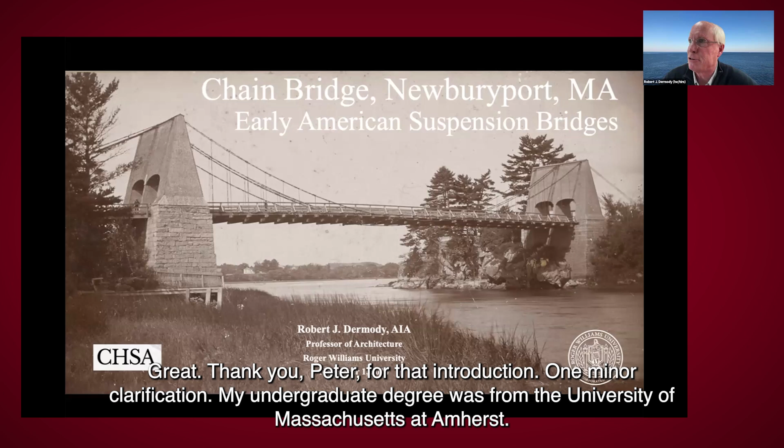Yes, we can. Great. Thank you, Peter, for that introduction. One minor clarification: my undergraduate degree was from the University of Massachusetts at Amherst, where I studied civil engineering and then got into architecture. But I have a love of bridges.

So I want to tell you the story about the Newburyport Bridge up in Newburyport, Mass., which was an early chain bridge. I was telling Peter recently how fascinating a project this was. I had heard about chain bridges, but I didn't completely understand that it was literal chain links that suspended this bridge.

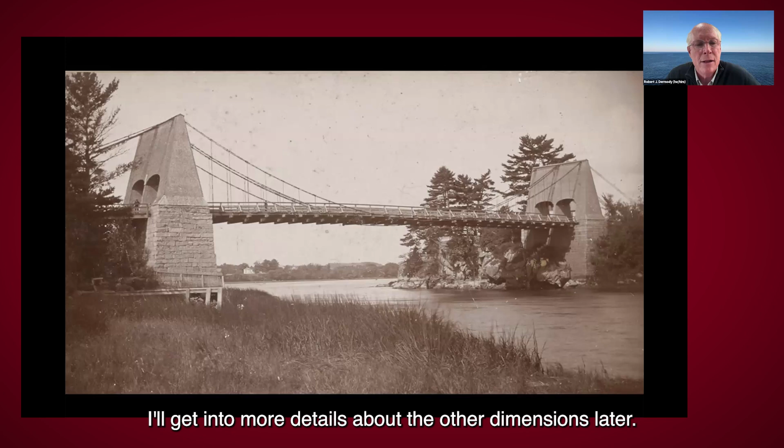So there's the image without the text, so you can see the beautiful setting of the bridge. It's about a 244-foot span. I'll get into more details about the other dimensions later, but it's significant to learn about why this bridge got built here, the use of these materials, and why this type of system was built at this time in this location.

So quick context for you: we're located just about 40 miles north of Boston.

So the bridge is located in that red circle on the Merrimack River. It spans from Newburyport, Massachusetts, into Salisbury via Deer Island, that small island in the middle of the river. There's another bridge on the other side.

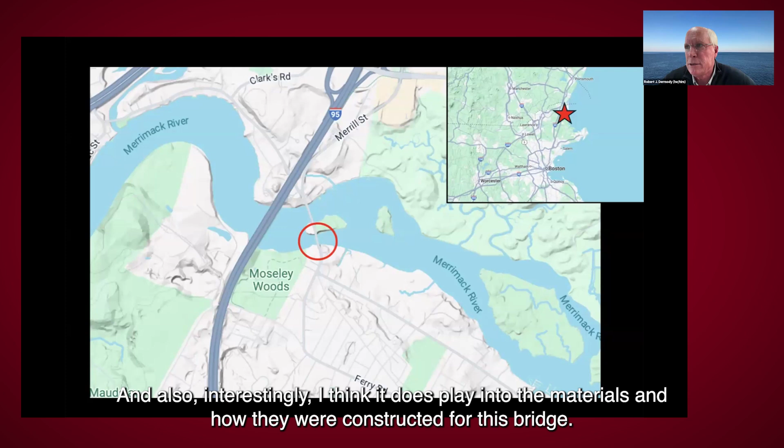I'm going to focus on the chain bridge. Route 95 has a modern steel tied arch bridge, and there are other bridges downstream, which is significant—a veritable confluence of bridges here. I think it also plays into the materials and how they were constructed for this bridge, not far from the ports of Salem and Portsmouth, which we'll factor in later.

So a little bit about the chronology of this location. There have been bridges at this site for over 230 years. The first one opened in 1792, which was timber, a common material for bridges of that era, but they didn't last very long—they couldn't survive the natural elements, the cold winters, the rain, the salt, etc.

So in 1810, a chain suspension bridge was built, closely modeled on a patent from James Finley of the Philadelphia area, who first built those types of bridges. He built about 10 of them in Pennsylvania.

In 1827, fairly early in its life, there was a partial collapse—this happened in February. There was noted to be heavy snow and ice on the bridge, and simultaneously some farm animals, oxen and horses, were being driven across it, and the confluence of that all caused the bridge to collapse. However, it was rebuilt in kind; they just replaced the chain, which suggests they believed in the system, but it was just primarily due to the heavy snow and ice.

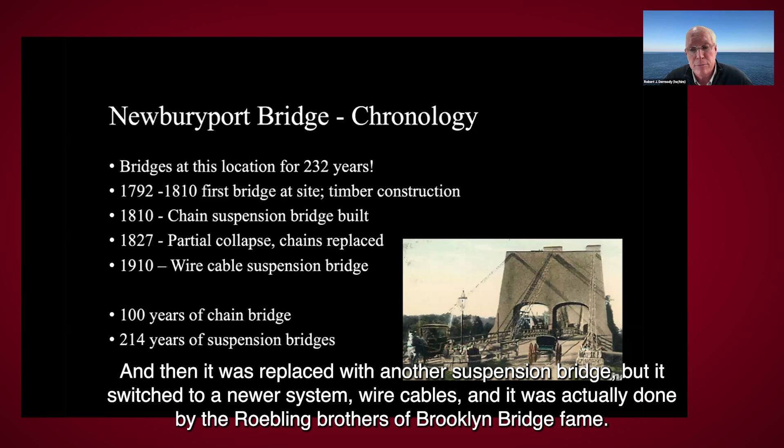The bridge did last until 1910, but it evolved, and I'll try to show you some images of that. It was then replaced with another suspension bridge, but switched to a newer system, wire cables, done by the Roebling brothers of Brooklyn Bridge fame, which had just opened not that much earlier. So the chain bridge lasted 100 years, a record at the time, and for over 200 years there has been a suspension bridge in this location.

This text here is captured from James Finley's patent application or description, and I've underlined some key terms. He's interested in safety, simplicity, economy, and duration for these structures. These certainly remind me, from my architectural education, of the principles from Vitruvius—firmitas, utilitas, and venustas. I also note that simplicity is perhaps something we could use in our modern structures.

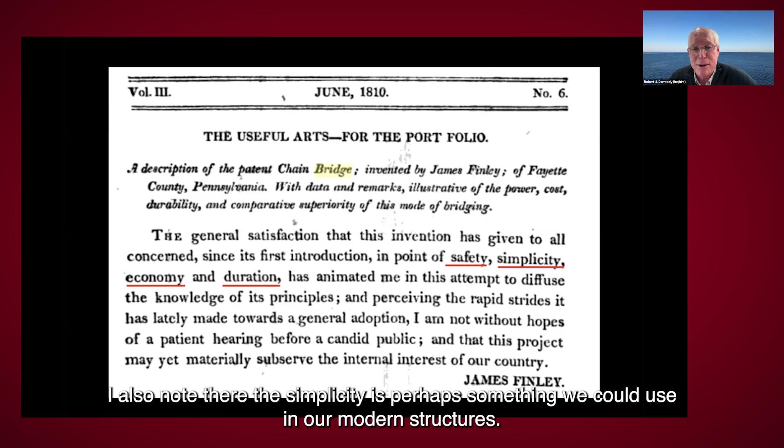This is an image not of the Newburyport Bridge, but of a chain bridge of this time from Finley's patent application. I just want to point out some key features of any suspension bridge, which interestingly have really not changed over time—the basic components and forms. But what has changed are the materials, connections, and ways to stiffen them.

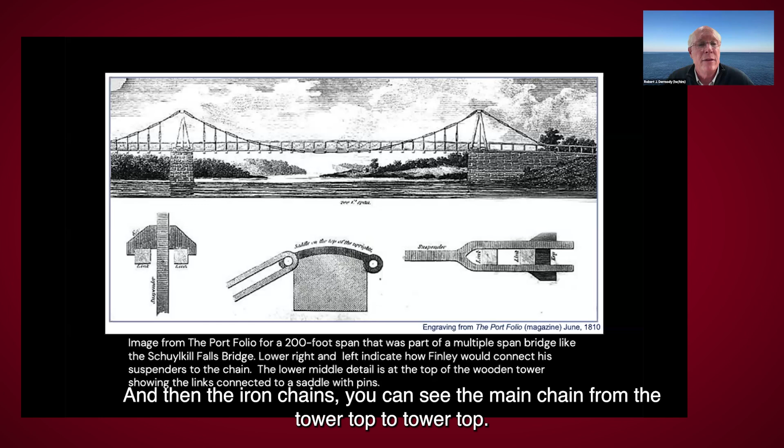Primarily, the components include the abutments, which were stone at this era and remained so for a long time. Timber was used for the towers on top of the abutments and for the deck. Then the iron chains—you can see the main chain running from tower top to tower top. There were also vertical chains from the main chain to support the deck, called suspenders.

Just below here, I highlight in red the cross section of the chain. The chain links were about 2 feet long, square in cross section, maybe about 1.5 inches on a side, so not very big. These were strung together, and we'll see in later drawings how they were specifically designed for the stresses they expected. In the center is a saddle showing how the chain would work over the top. It's interesting—they used a separate piece for the curved portion because they didn't want to bend the actual chain link itself.

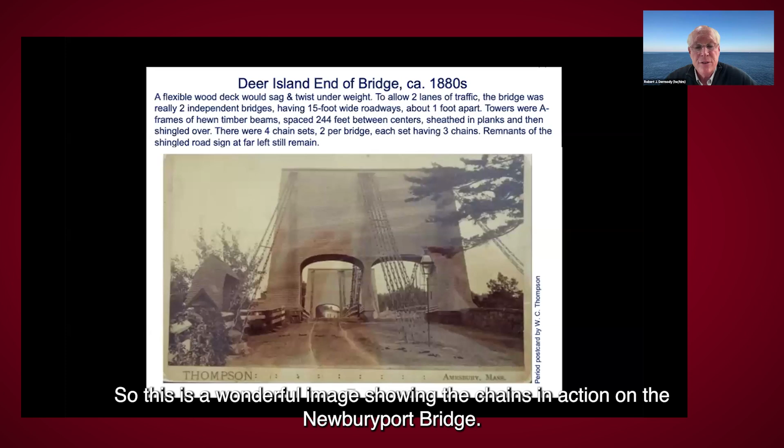This is a wonderful image showing the chains in action on the Newburyport Bridge. You'll see there are 3 on the far left, 3 on the far right, and 6 in the center—so 3 each for the spans on either side. There were individual passageways on each side, separate portals. The tower here is also a good shot of the beautiful shingle covering the timber framing, a classic New England shingle style.

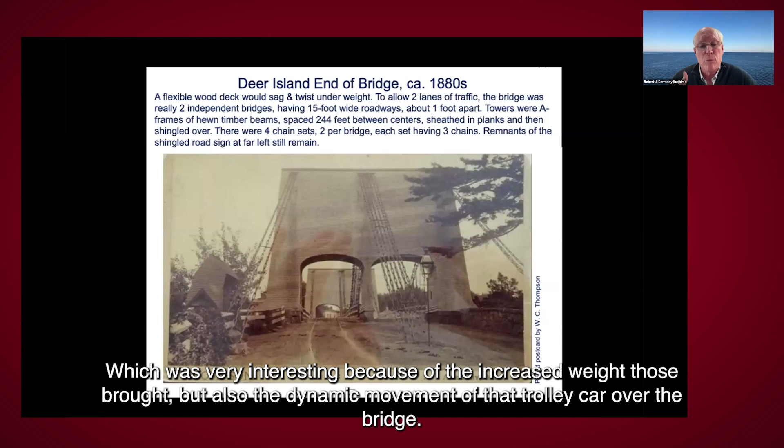You can also notice train tracks—electric trolleys were added to the bridge much later, which was very interesting because of the increased weight those brought, but also the dynamic movement of the trolley car over the bridge. That was one of the challenges for early bridge builders: stability. Strength was not as much of an issue, but stability and stiffness due to dynamic loads—from farm animals as I mentioned earlier, from trolley cars, and also from wind from the side.

This image also shows something very important about the chains. The chain out over the center of the span is a catenary curve, and that comes from the fact that the vertical suspenders are evenly spaced, which helps work with the deck. But the backspan chains, as you can see on the right side of the photo, have no vertical suspenders, so they're straight.

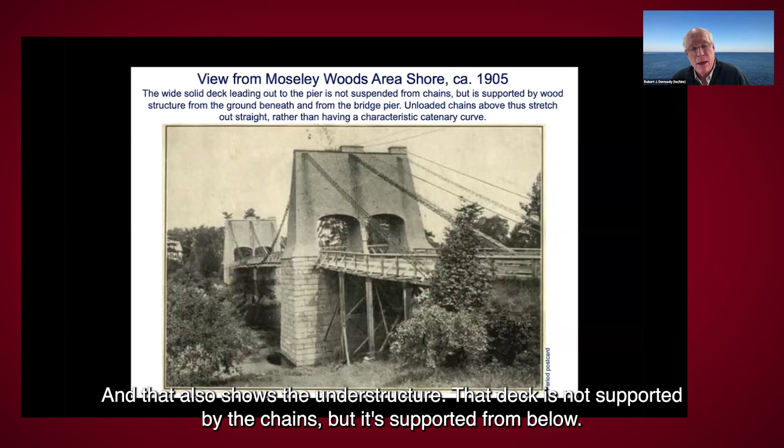That also shows the understructure. That deck is not supported by the chains, but supported from below by timber framing. You'll notice one dark timber frame there in the center at an angle, leaning down onto the abutment, and I'll talk about that in a moment.

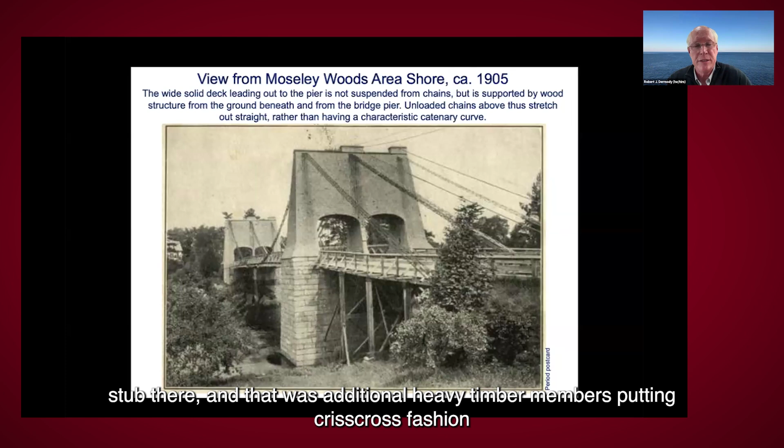A couple of other things to notice in the middle and top right side: you see a little stub there, and that was additional heavy timber members put in crisscross fashion to allow additional wire cables. Wire cables were added before the end of the life of this bridge, because that was the side where the trolleys were, which had a heavier load, so they added extra wire cables. Then at the very top, the very thin lines were the electrical cables.

Also notice the form of the two portals with the center wall.

I found this drawing in the research. It was a beautiful drawing of the record of the structure of this building. On the far left are the longitudinal sections, and on the far right are the cross sections in elevation. On the left you see the timber framing used inside, which was covered — the covered bridge aesthetic from New England, and that knowledge was brought to bear here.

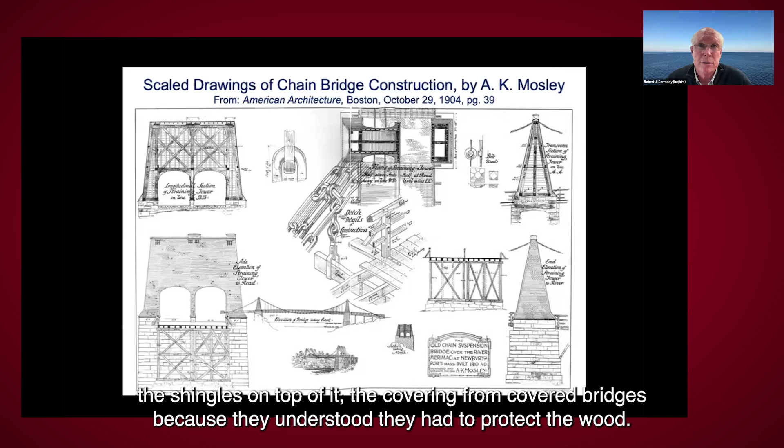On the lower left, we see the timber framing inside the abutment, and these are direct relations to other constructions in the area: timber framing from barns and large churches, the shingles on top, the covering from covered bridges because they understood they had to protect the wood. Lower left, these are very similar to piers built along the New England coast using heavy timbers with rocks inside them, called cribs.

On the right, a couple of things to note from Mr. Finley's patent application. The chain at the top wants to have the same angle on either side of that tower. In fact, in this drawing, the chain on the right should be straighter because that's the one without the suspenders. The significance of the equal angles relates to the structural principle of ensuring that the resultant vector, the compressive force from the tension in the cables, would go straight down into the tower.

That provides stability and stiffness to the tower as well. You'll see the tower is the two outside timbers, but also a center one, which would take that force right down into the abutment. In the lower right, you can just see a little diagonal — that's the strut we saw in the earlier photo, helping hold up the backspan using the abutment so they didn't have to go all the way to the ground at that location. It's an angle providing some stability as well.

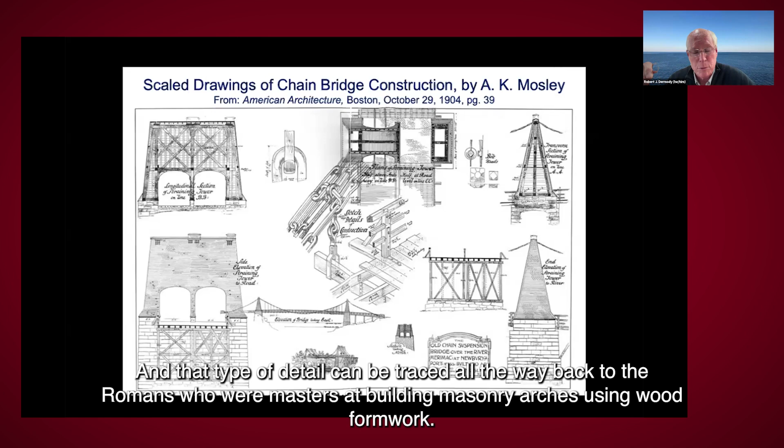That type of detail can be traced all the way back to the Romans, who were masters at building masonry arches using wood formwork. There's a very similar detail you can trace back to the Pont du Gard in southern France, in Nîmes, where the Romans would build little ledges in their masonry to put a strut to support the formwork. It's an interesting tradition of construction coming down through the ages.

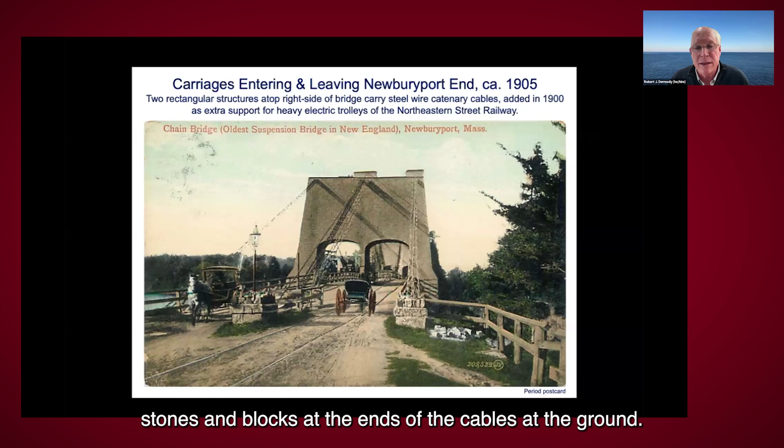This photo shows some things we've seen before, but I want to call your attention to the anchorages, the large stones and blocks at the ends of the cables at the ground. We see two of them here on the trolley side; we can't see the one on the far left because it's a little lower. That was a significant part of the design as well.

James Finley noted in his patent that it would be advisable to splay out the chains when they got to the anchorages, meaning add more branches. So instead of a single chain, it would branch out into multiple chains, and that allowed more surface area to be piled over with rock.

A large pit would be dug, stone would be set in the bottom, the chains would be laid on top, and then heavier stones and blocks would be laid on top of that. They may have even used some iron bolts to secure it.

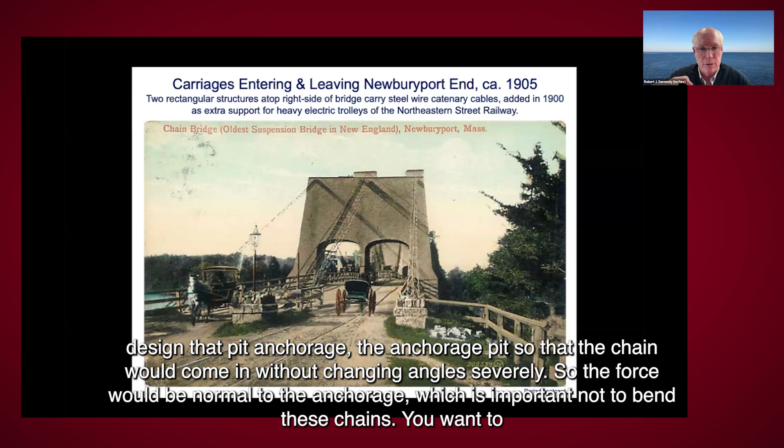It's also important to design that anchorage pit so that the chain would come in without changing angles severely, so the force would be normal to the anchorage. This is important, not to bend these chains — you want to let them work in their pure tensile capacity.

They studied them and wanted to find their strength, and wanted to find out where they might break and how they might break, and study the welds.

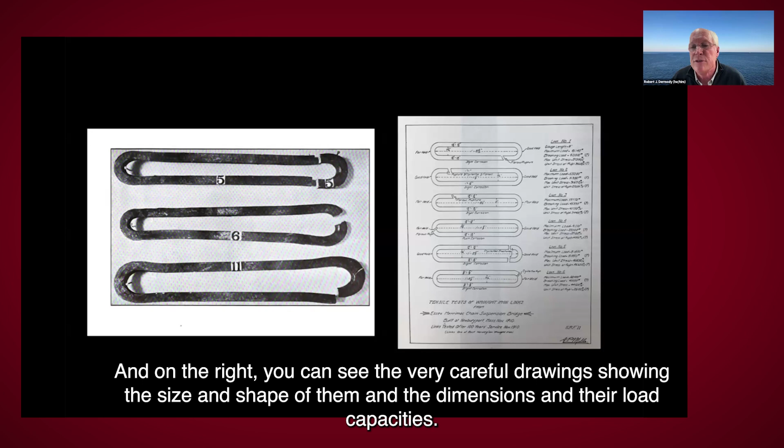The drawings also show the dimensions and their load capacities. Especially in that bottom one, you can really see the ends would be thickened right where the next link would come in.

This is early 1800s, and this is not Newburyport now. These are much bigger span bridges, but also called chain link bridges, though in a very different style. The bridge on the left is the Thomas Telford Menai Bridge in Wales from 1825.

On the right is the Clifton Suspension Bridge by Isambard Kingdom Brunel, 1831. But these are different, much bigger spans.

But they're flat bars, and the difference with this system is you can aggregate them. You can just stack them side by side and increase the capacity and layer them.

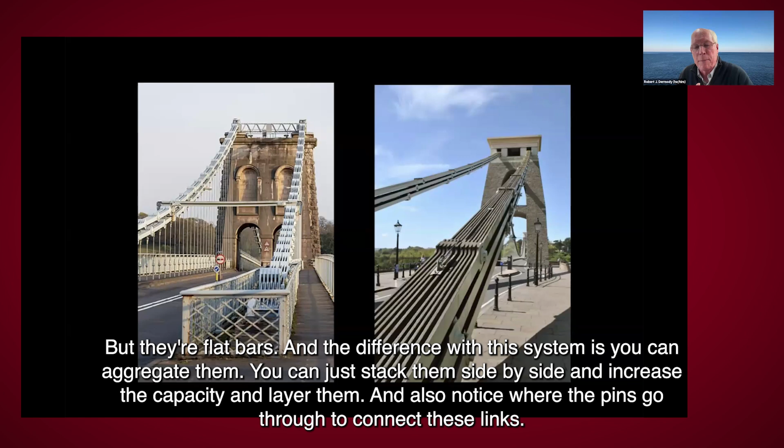Also notice where the pins go through to connect these links, the bar itself is widened into a dog bone shape. That shows they understood there would be increased stress right where the pin is acting and bearing on the inside of the pin connection.

My sense is that they had a bridge that was working, and this one overlaps with the chain bridge, although I don't think it lasted as long. I'm not sure why, but my theory is that it was a much bigger, longer bridge, much more exposed to the weather, and had many more moving parts.

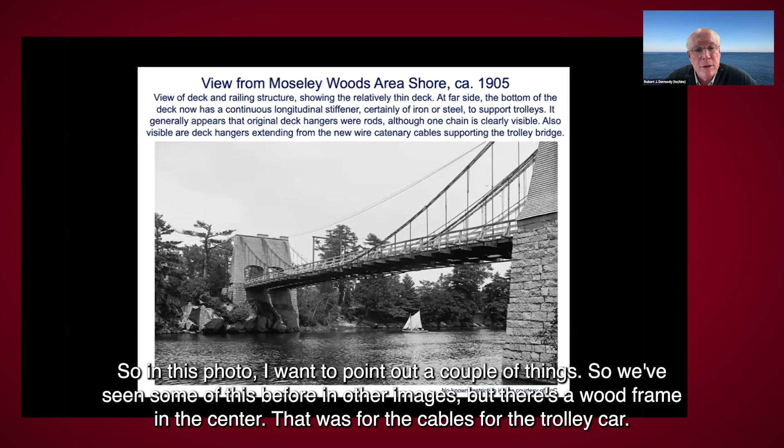In this photo, I want to point out a couple of things. We've seen some of this before in other images, but there's a wood frame in the center — that was for the cables for the trolley car. There's also a stiffening girder under the trolley car side.

In the very center, right over the little sailboat, you can see a curve coming down below the deck. That's an interesting relationship the designers have to decide upon — the relationship of where the deck is to where the chains are.

Also interesting to note here, as we have additional cables, the main chains are still there, but the verticals — now some of them appear not to be chains. There is one on the far right that you can see, very close to some others, that is still a chain.

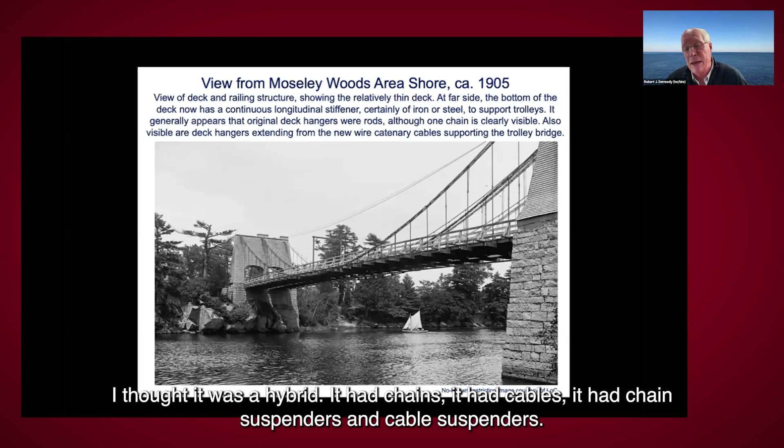So this bridge was a hybrid — it had chains, it had cables, it had chain suspenders and cable suspenders and stiffening girders. It was sort of evolving because it lasted so long.

There's a beautiful postcard of the bridge, and there's lots of them. So the bridge was well loved in the community. It was painted and photographed by people. You can see the trolley car going over, and you can see the steamship. So it's a very active area.

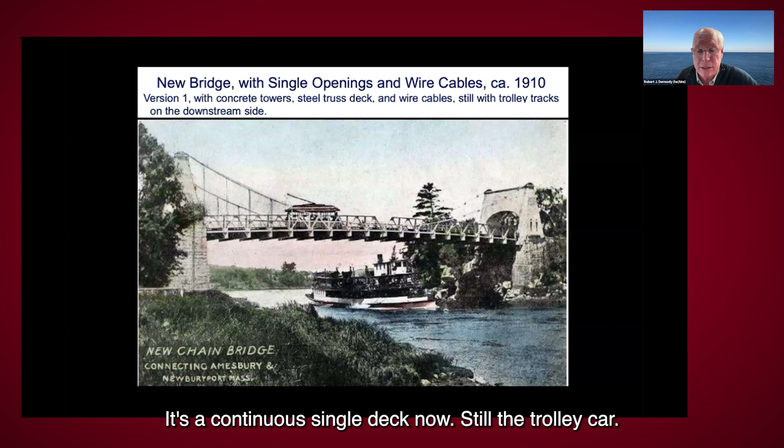But I show this photo because I want you to compare it very closely to the next one. You'll notice now the tower is very different. There's a single portal now. This is 1910, so this is the new bridge. It's a cable bridge, with cables only on the outside of the deck. It's a continuous single deck now, still the trolley car, but also notably a very deep 5.5 feet or so stiffening truss on each side of the bridge to help stiffen the deck. The vertical suspenders appeared to be spaced a little differently than before, and also much deeper cross members.

So here's a photograph of it very recently in today's form. The tower is still in the same sort of mode, but not as characteristic. It's not shingled, it is concrete. It shows the single portal, but we do have riveted steel trusses on each side. You can see the paired cables.

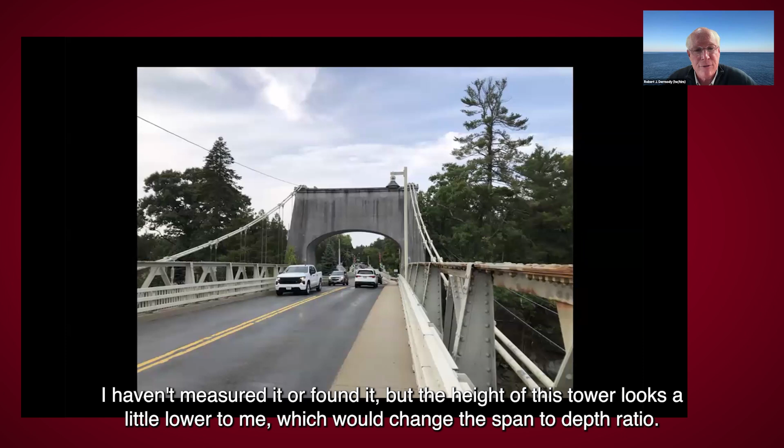I haven't measured it or found it, but the height of this tower looks a little lower to me, which would change the span to depth ratio of the bridge. But the wire cables could handle that increased load with the lower cable, because a flatter cable would tend to have more stress than a deeper cable. But that's the trade-off in suspension bridge design: deeper cables or a bigger sag has less stress, but therefore you have to build bigger towers.

It's a very well-loved bridge. There's lots of signage there proclaiming its endurance and who built it. There's obviously some weight limits on it today. But I'd just like to close with the importance, I think, of the legacy of this and why this type of bridge wound up in Newburyport, Mass.

You had a very talented craftsman workforce of people who built barns and churches out of wood. There were Irish immigrants who built masonry structures for churches, dams, and bulkheads for harbors, and blacksmiths, related to both the agricultural and the maritime industries. So those all came together, and I think what can be most interesting is the combination of all of those. Each worked in their separate industries, but it's the combination of them into this beautiful bridge that allowed it to last so long.

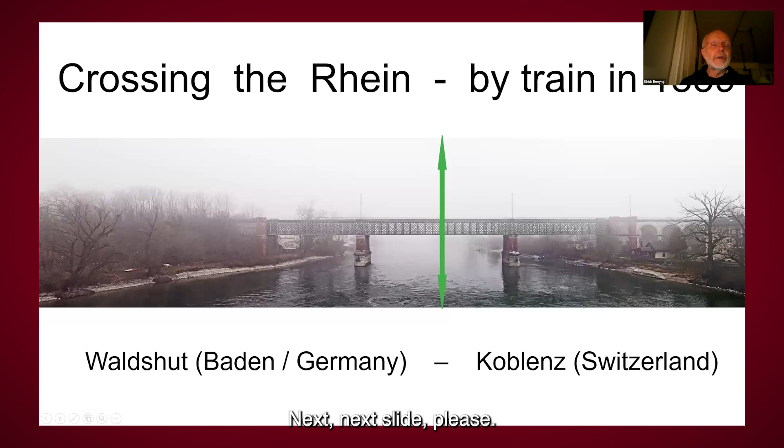For a few minutes, I would like to take you to the middle of the 19th century, to Europe, southern Germany, to the Grand Duchy of Baden, and to the border of Switzerland. At that time, Baden was a sovereign state in the so-called German Confederation.

In 1840, the Baden State Railway opened its first railway line between Mannheim and Heidelberg. The railway then followed the River Rhine and reached Basel at 1855. On its long-distance goal to Lake Constance, the track construction stopped in 1856 in Waldshut.

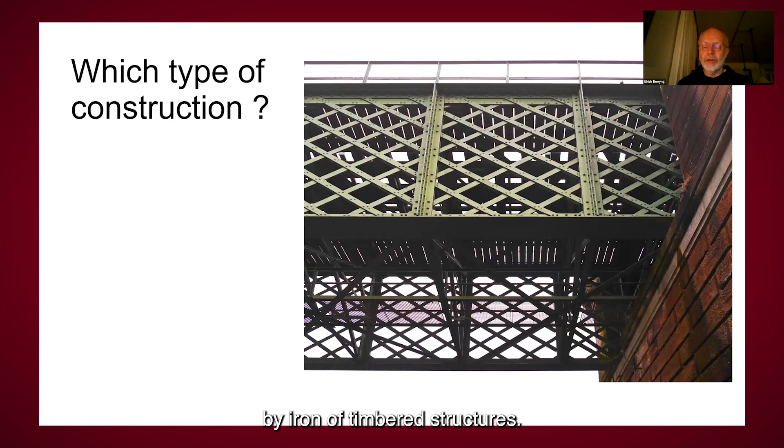I don't have to read all the terms, you can see it yourself. The total length is about 190 meters, or about 208 yards, including 6 massive arch openings in Koblenz. On the left side is the Swiss side, on the right side the Baden side. The actual iron construction measures about 130 meters. On top, the bridge could have carried 2 tracks, but it never did more than 1. The puddle iron weighs about 530 tons, and the iron construction was assembled within 8 months, from December 1858 till July 1859.

Benckiser used the later railway embankment in Waldshut to build a wooden workshop building, 22 by 27 meters. It was large enough to build the parts of a third of the total length under its roof. You see the roof and the workshop on the right side.

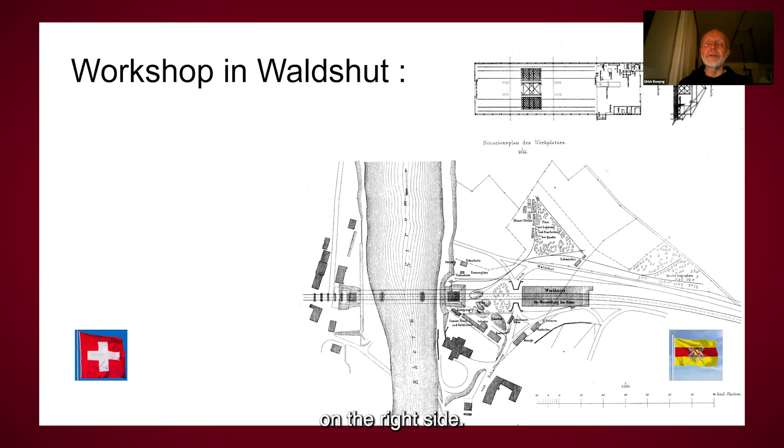The whole construction was manufactured in 3 parts, successively built and moved outside the workshop, connected with approximately 33,000 rivets to lattice girders. The parts were connected between the middle of May and the end of June 1859, to a total length of 130 meters.

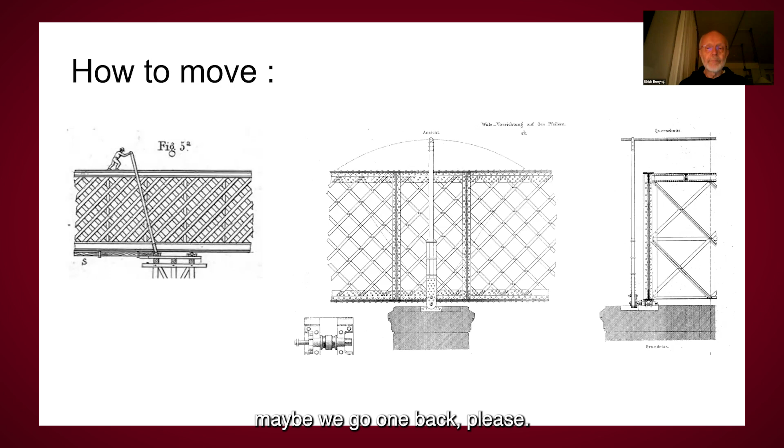During each of the 3 advances, the connected parts were pushed forward outside by about 44 meters. Since there was no scaffolding over the river, a wooden stem beak was mounted in front of the girder, seen here in the middle.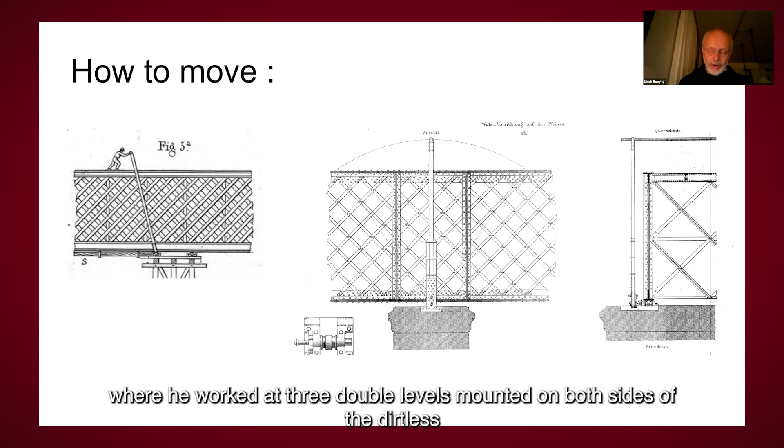Benckiser also required a wooden auxiliary support about 37 meters away from the pillar to reduce the free floating overhang in the wide center opening. To move the construction, the company needed the strength of about 60 men divided into 3 groups standing on top of the bridge. A painting from Bern shows where the workers stood upon the girders. They worked at 3 double levers mounted on both sides of the girders, and every move of the levers shifted the structure approximately 10 centimeters, so they had to move for a very long time.

Between June 29th and July 9th, it finally took 10 days to move the iron bridge over the Rhine. The iron structure then had to be completely lifted in order to install the final support rollers. And now to the historic photos.

The contemporary photos from 1859 show the bridge under construction, seen from the Swiss riverbank. In this first photo, you can see on the left side the massive structure, and on the right side, in the middle, you can see the iron construction coming from the right side, though not very clearly.

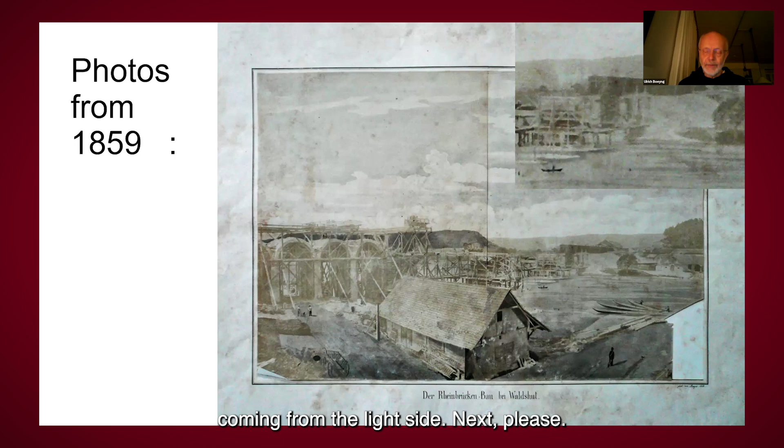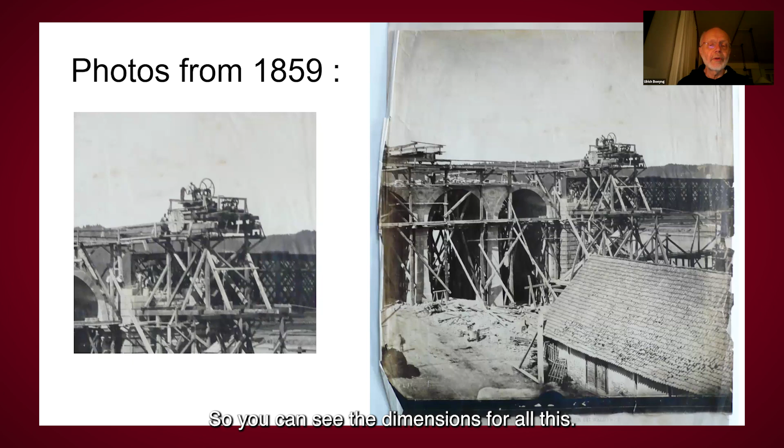Here is a view of the construction. Interesting is that you can see the wheel on the left side, and there is a small person, so you can see the dimensions of all this.

Benckiser strived to perfect their skills in every project. For example, in Strasbourg in 1861, an attempt was made for the first time to move the 177 meter long iron structure across the Rhine using steam engine power. Since this was unsuccessful, the about 1,000 tons had to be moved again using only muscle power.

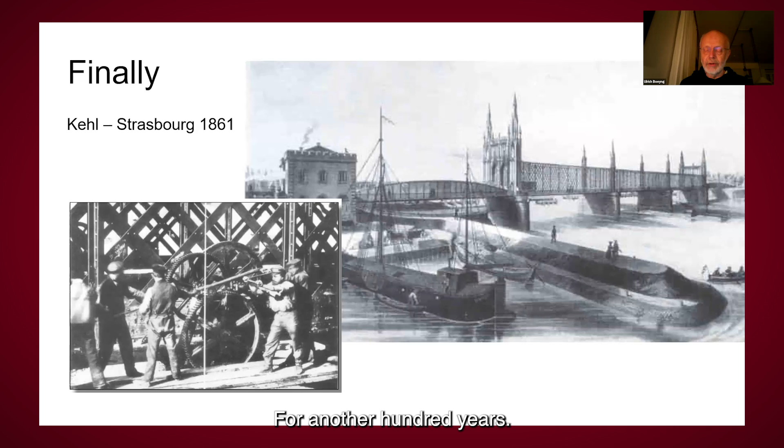And my last words: in 2009, Switzerland listed the bridge as a cultural asset of national importance, and in 2012, the German Monument Preservation Authority followed suit by assessing it as a cultural monument of particular importance. So we can hope that the bridge manages to stand for another 100 years or even more.

Last, please. Thanks for listening.

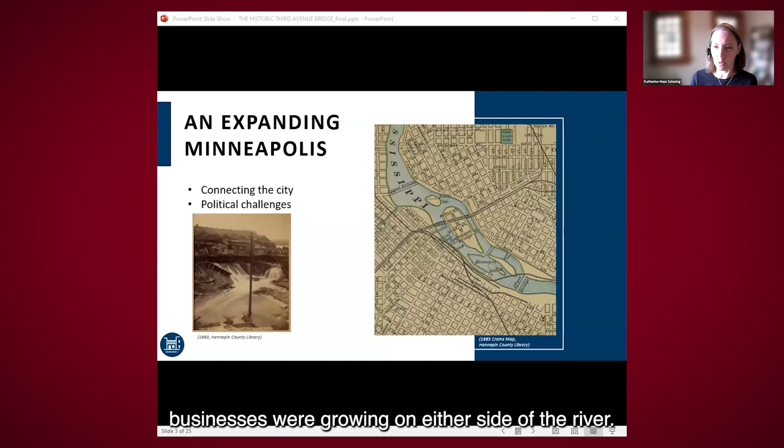Okay, so at the turn of the 20th century, Minneapolis was expanding rapidly. We had flour and lumber mills harnessing the power of the Falls of St. Anthony. Businesses were growing on either side of the river. To the west, Minneapolis's downtown was growing, and to the east, the village of St. Anthony was also picking up steam and becoming a burgeoning residential and business district.

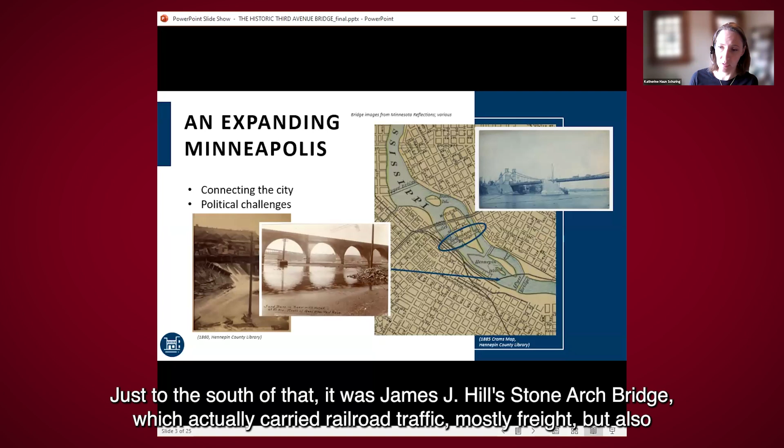Politicians began discussing the need for another crossing of the Mississippi here as early as 1890. But at the time, there were only 4 crossings of the Mississippi. The first was the Hennepin Avenue Suspension Bridge. Just to the south of that was James J. Hill's Stone Arch Bridge, which carried railroad traffic, mostly freight, but also people over the Mississippi. Further south was the 10th Avenue Bridge, the Levee Bridge, and to the north, the Upper Bridge, also known as the Plymouth Avenue Bridge. So very, very few locations.

Of these, the Hennepin Avenue Bridge saw the most traffic. And just like engineers today, they counted the traffic at the time, and here you can see how they were making a case for the need for a bridge. Hennepin Avenue was overwhelmed with traffic, wagon traffic, automobiles, carriages, pedestrians, compared to the 10th Avenue Bridge to the south and the Plymouth Avenue Bridge to the north. It's no wonder that the suspension bridge was seeing so much traffic because it was the only bridge actually located within downtown Minneapolis. Not shown in this graphic is the streetcar line that the Hennepin Avenue Bridge also carried, running to the village of St. Anthony, carrying several thousand people.

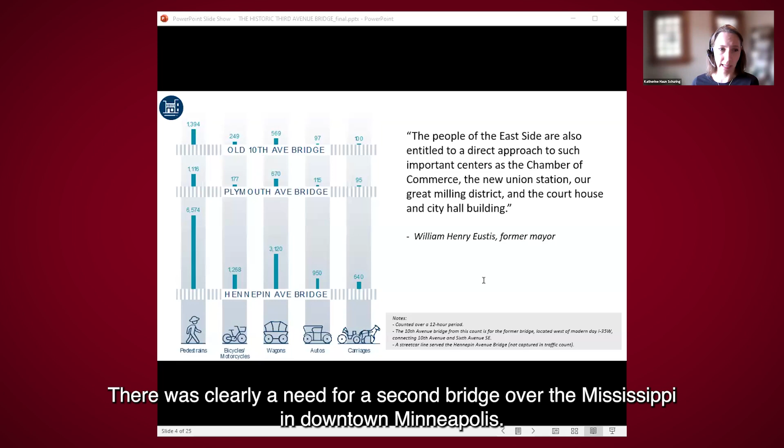Today, that streetcar line continued to the east all the way into St. Paul. There was clearly a need for a second bridge over the Mississippi in downtown Minneapolis. But it took decades of debate, strife, and public requests before the Minneapolis City Council actually agreed to place a new crossing between Hennepin Avenue and the Stone Arch Bridge. The city bridge engineer at the time,

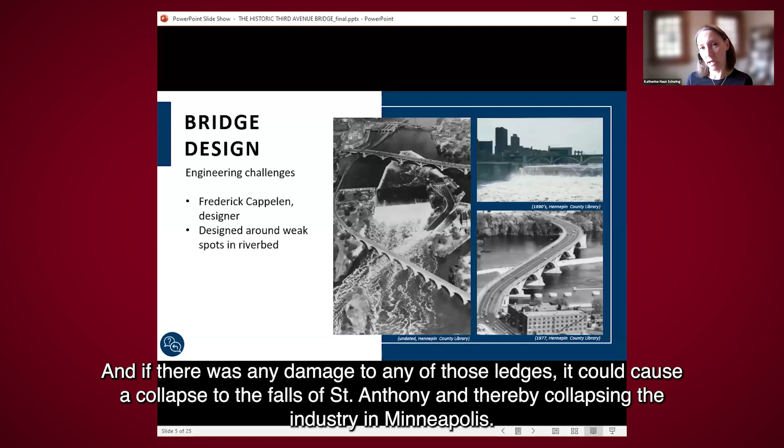Frederick Cappelen, was the designer and was tasked with making the council's directive a reality. Cappelen was a Norwegian-born engineer who was educated in Sweden and Germany and emigrated to the United States in the 1880s. He understood that the location of the new bridge was a precarious one because in this particular area of the river, there are very fragile limestone ledges. And if there was any damage to any of those ledges, it could cause a collapse to the Falls of St. Anthony, and thereby collapsing the industry in Minneapolis.

Okay, so what did he do? The city actually hired the concrete and steel engineering company out of New York to design a bridge. National public sentiment at the time really liked concrete arches, reminiscent of the arches in Paris, as seen in a couple of different newspaper articles.

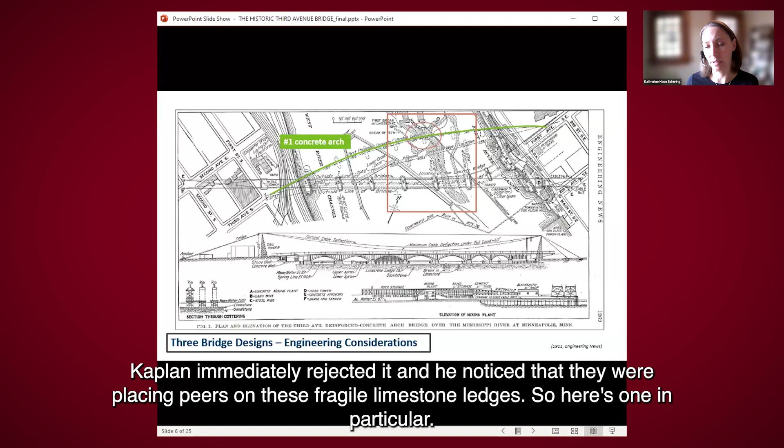Really, people wanted an arched bridge over this location. So the engineering company came back with this design. Cappelen immediately rejected it, noticing they were placing piers on fragile limestone ledges. Here's one in particular, right on top of that ledge, probably would cause a collapse of the falls.

So Cappelen took it upon himself to design his own bridge. He designed a parabolic arch that would span 435 feet across the river, with only a couple of pier locations in the river—a beautiful thing. But the public said no, I don't want that, I don't like that, I want something more pretty. So Cappelen went back to the drawing board.

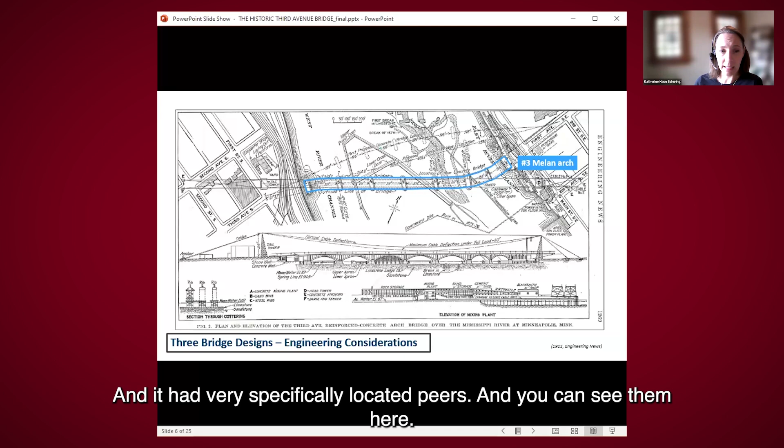He collaborated with the concrete and steel engineering company to come up with this final third design. It's a Melan arch—concrete steel superstructure embedded with concrete—with very specifically located piers, right along the river, avoiding those fragile limestone beds. The only way to do that was to create this curve, so you're creating a curve in the bridge to make sure the Falls of St. Anthony would be maintained.

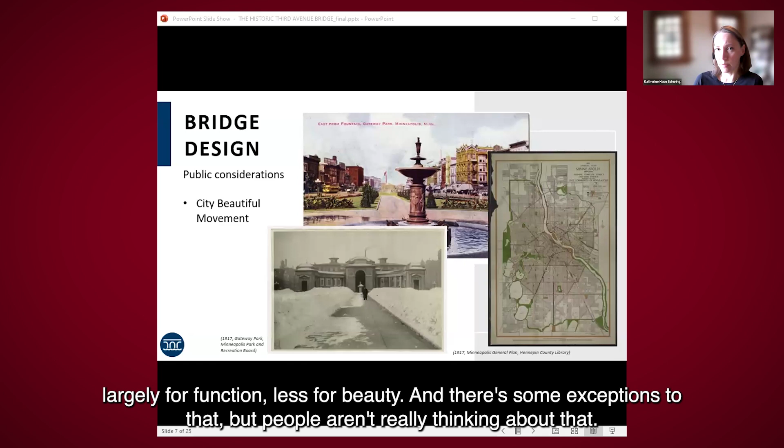So why are people so interested in the design of a bridge? Predominantly prior to the early 20th century, bridges were designed largely for function, less for beauty. There are some exceptions, but people weren't really thinking about that. Aesthetic consideration in bridge design was becoming a really important thing in the early 20th century, largely due to the City Beautiful movement.

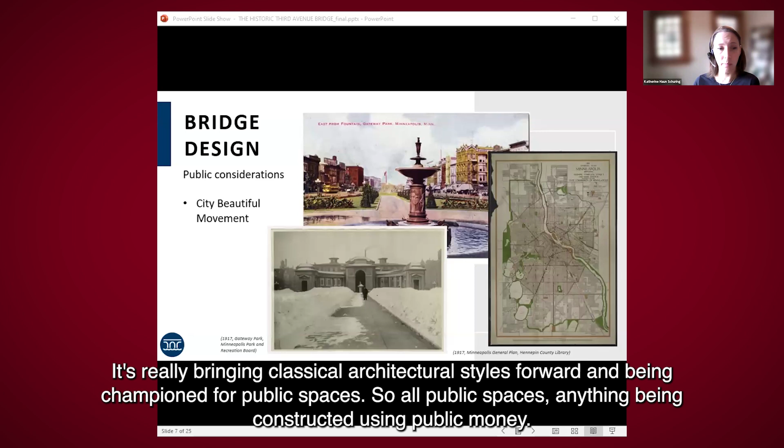That's emerging from the 1893 Chicago World's Fair. It's bringing classical architectural styles forward and championing them for public spaces. So all public spaces, anything constructed using public money, would be designed to be beautiful, classical, harkening back to a period of Greek and Roman architecture, where people were really feeling democracy. There were a number of places within Minneapolis where you saw that come forward in public buildings—Gateway Park is an example.

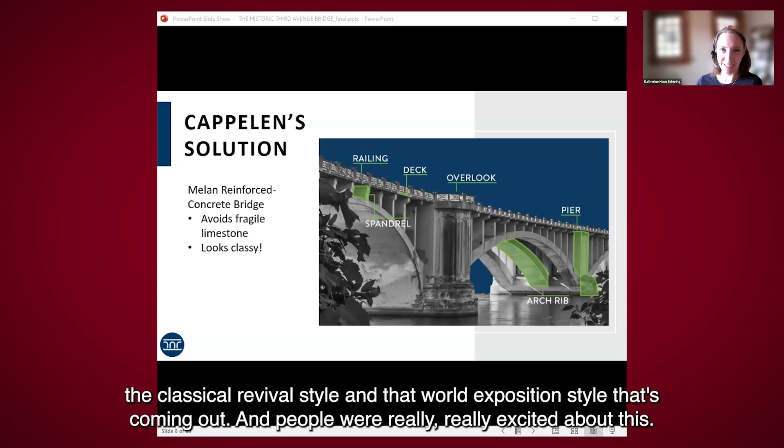So what's the solution here? We've got a Melan reinforced concrete bridge. Cappelen's solution is to avoid that fragile limestone, but it looks really nice and the public is very happy with this. It embodies the classical revival style and that world exposition style that's coming out, and people were really excited about this.

This is Chris and I's favorite quote from a newspaper article: 'Stone arch construction would have been impossible or exceedingly expensive. Steel bridge construction would have been awkward, kinky, and crude.' There you go, Cappelen—your bridge design was awkward, kinky, and crude. But with reinforced concrete, no trouble was encountered in making the gentle curves and creating a pleasing appearance.

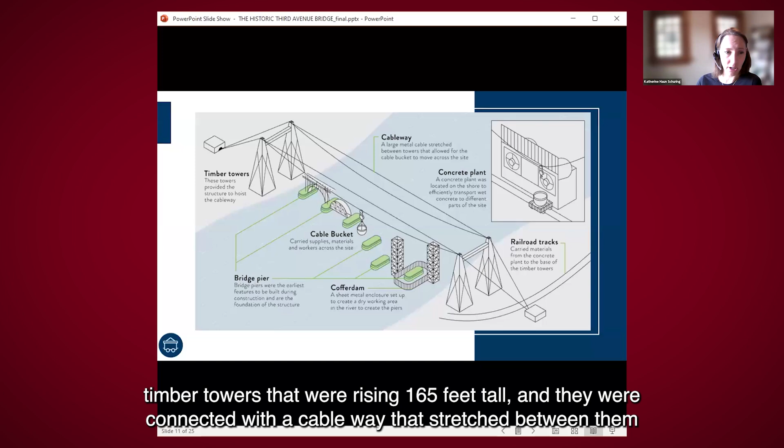So here we are, August 1914, we start building the bridge over the Mississippi. How did they do it? To move materials and supplies over the river, construction workers erected timber towers rising 165 feet tall, connected with a cableway stretched between them. On that cableway they ran buckets and supplies out into the middle of the river to those construction workers.

Cofferdams were erected within the middle of the river, or wherever they needed a pier, and built down into the riverbed, secured in the riverbed, and from there they would support those arches.

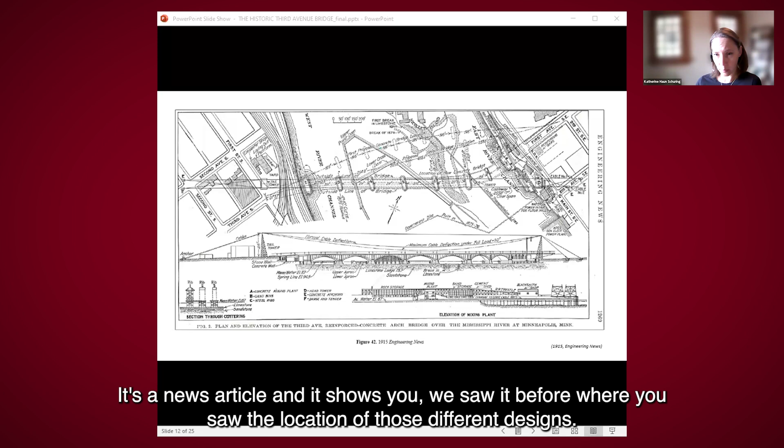This is a really wonderful image from the 1915 Engineering News. It's a news article that shows the location of those different designs, but here in the bottom part of the image, you really see how those timber tower structures stretch that cable all the way across the Mississippi, and how they built and brought in those supplies.

They had an actual rail line that came in, with a mixing plant. They brought their rock in, did all of their mixing in batches right there on the side, on the east side of the river, put it in those buckets, and sent it over the river into the locations where things were being constructed.

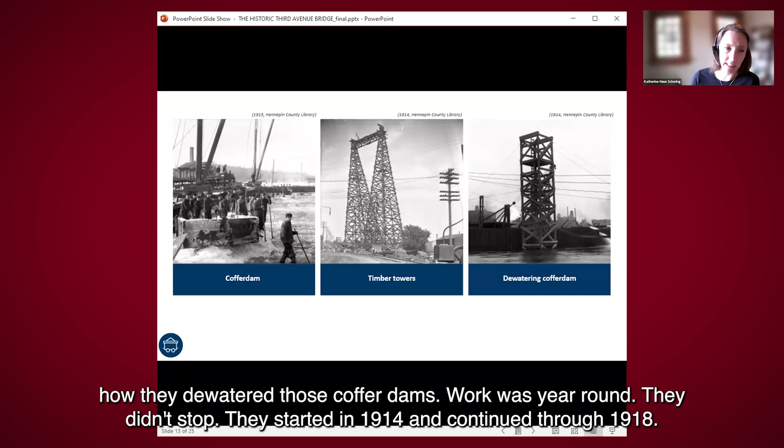Here's some great images from our historical society showing construction of the cofferdam, construction of timber towers, and how they dewatered those cofferdams. Work was year-round—they didn't stop. They started in 1914 and continued through 1918 in the sleet, snow, and very bitter cold of Minnesota. They made their concrete mix work by heating the sand and water, making sure their Portland cement and all of their superstructure was warm to maintain the consistencies they needed.

Couple of other images here. Bridge falsework was erected over the concrete piers to build those steel arches that then would be encased in concrete. Initially, it took crews 1 day to move falsework between the different sections, but by the end of the project, they were able to move that falsework in 2 hours and 40 minutes. So they found a lot of efficiency.

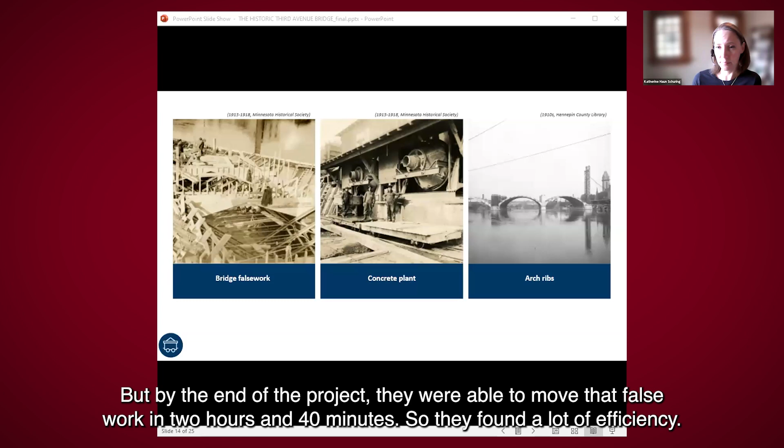Here's a wonderful image where you can see one of those concrete ribs has been constructed and they're moving on to the second one. Each span has 3 concrete ribs, so you can imagine moving that falsework 3 times and then moving on from there. From those falsework, those open spandrel columns would rise up from the arches and would then support the bridge deck.

Opening day was June 14th, Flag Day, in 1918. City Council asked all of the community to come out and celebrate, and all of the schools had their students come out as well. It took 4 years to construct that bridge.

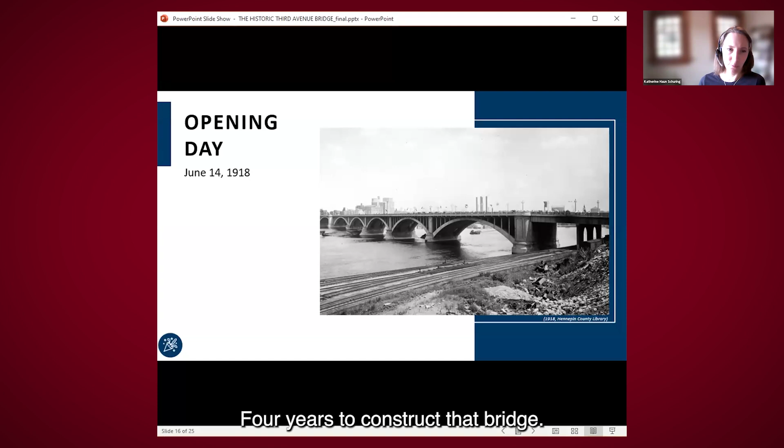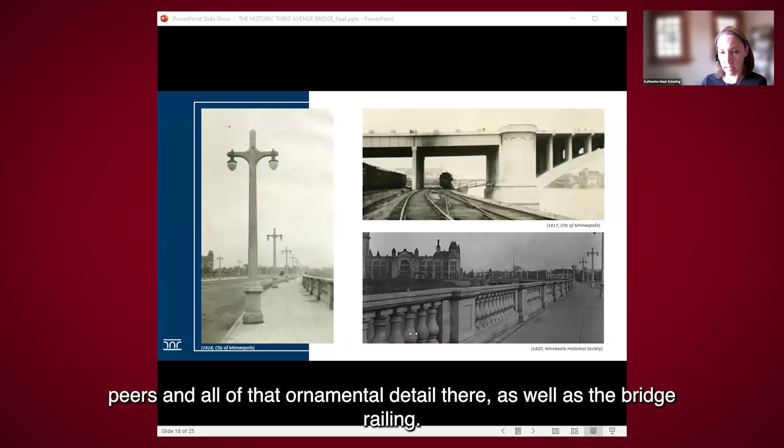That classical revival detailing is on full display. It's very apparent in the piers and all of that ornamental detail, as well as the bridge railing. The light posts, the light standards, were quite unique, a specialty design for this particular bridge. At the very top, this is where the streetcar line electrical wire would have been connected. It would run down the electrical line through the middle, and then be supported on the tops of these rails.

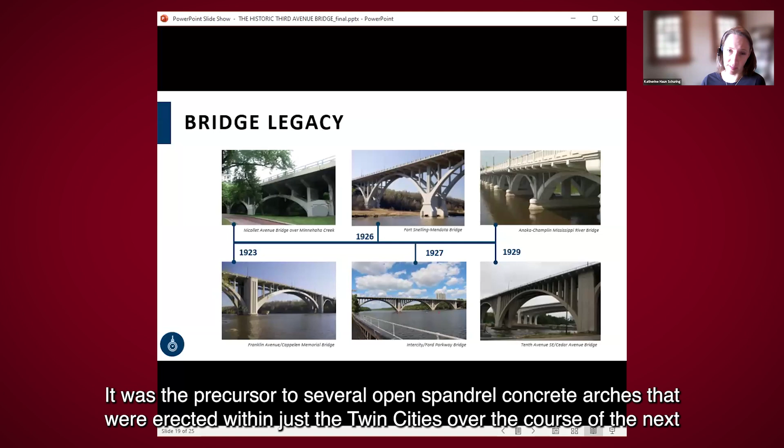The bridge legacy: this is an incredibly important bridge to Minneapolis history as well as Minnesota engineering history. It was the precursor to several open spandrel concrete arches that were erected within the Twin Cities over the course of the next 10 years. All of these are great examples of the design style, but Third Avenue is the one that set it all off.

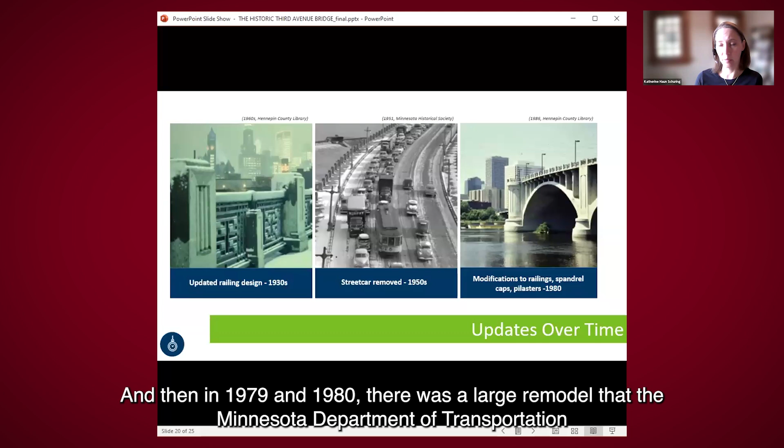There were several updates over time. The railing was changed out in the 1930s to what we have there today, which is more of an Art Deco style, with aluminum panels with concrete pilasters. The streetcar was removed in the 1950s after the decline in streetcar usage and the more popular way to travel by automobile. Then in 1979 and 1980, there was a large remodel that the Minnesota Department of Transportation did on the bridge. And Chris is going to talk a little bit about the result of that rehab and how we had to come back here in 2023.

So Chris, would you be willing to tell us all about the 2023 rehab? Yeah, absolutely.

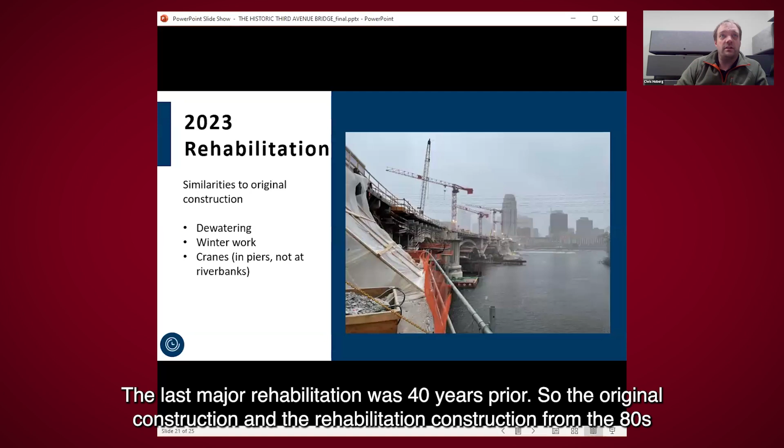We started our project in 2020, and it really stems from deterioration of the structure over time. It's roughly 100 years old at that point, a little over 100 years old. The last major rehabilitation was about 40 years prior. So the original construction and the rehabilitation construction from the 80s are starting to deteriorate, and that deterioration is getting kind of advanced. So at the end of the day, the engineering need here is to go out there and make some repairs to keep this structure in service.

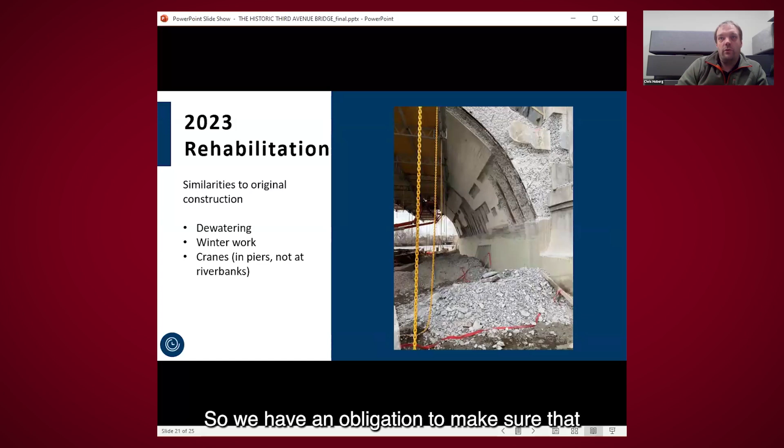Of course, the wrinkle with this particular project is we're dealing with a historic structure. It's designated, identified as a cultural resource. So we have an obligation to make sure that the work we do is not detracting from its historical significance. Interestingly enough, a lot of the techniques used in modern construction are very similar to those used when it was originally constructed. At the end of the day, the basic physics of a bridge and construction don't change. Technology changes, materials change, our ability to execute that work changes, but the basics of physics don't. So a lot of those similar techniques exist today as they did when this bridge was constructed.

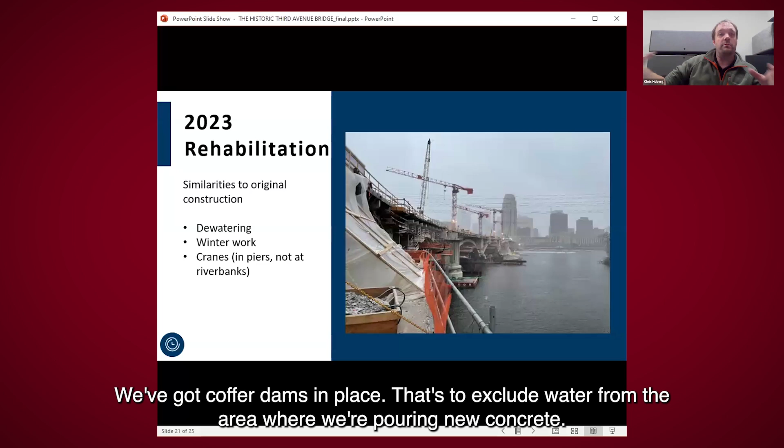In some of these photos, you can see we've got cofferdams in place. That's to exclude water from the area where we're pouring new concrete. That concrete needs to cure before it's inundated with water from the river, both to gain its strength and to avoid losing materials during that curing.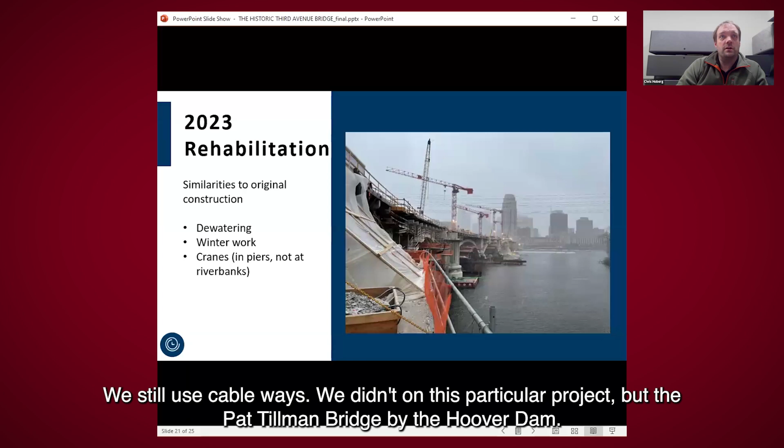So they dealt with that in the early 20th century, and we were dealing with it in the early 21st century, just the same. We built cofferdams out in the river to pour new concrete and make repairs just like they did originally. We still use cableways today—we didn't on this particular project, but the Pat Tillman Bridge by the Hoover Dam, built in the last 10 years or so, used a cableway over the gorge. So that's a technology still in use today, though we didn't use it in this case.

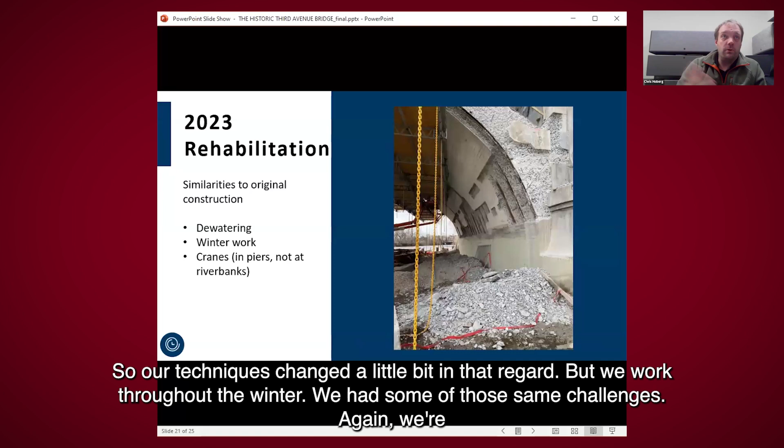A big difference between the 2023 project and the original construction is that the city has grown up in that time. Properties that were previously industrial uses have been repurposed for recreational, residential, or business use, and they're not available to us today the way they were at the turn of the century when the bridge was built. So our techniques changed a little bit, but we worked throughout the winter and had some of those same challenges.

Again, we're trying to rehabilitate a structure here and honor its history. So in the way we prosecute that work, we put a lot of time and effort into making sure we weren't going to induce new damage or detract from that history, and to try and extend its service life.

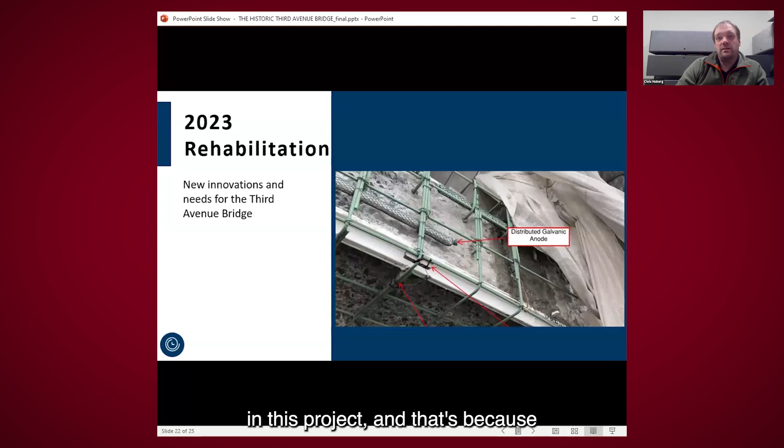We brought in some new innovations. You can see in this picture we put quite a bit of time and effort into a corrosion protection plan—a lot of anodes, cathodic protection in this project. That's because when we look at a historic structure, it's protected by federal law, but beyond that, you have elements that are really central to its historic significance. The Melan arches are one example of a character-defining feature that really requires attention to detail in its rehabilitation.

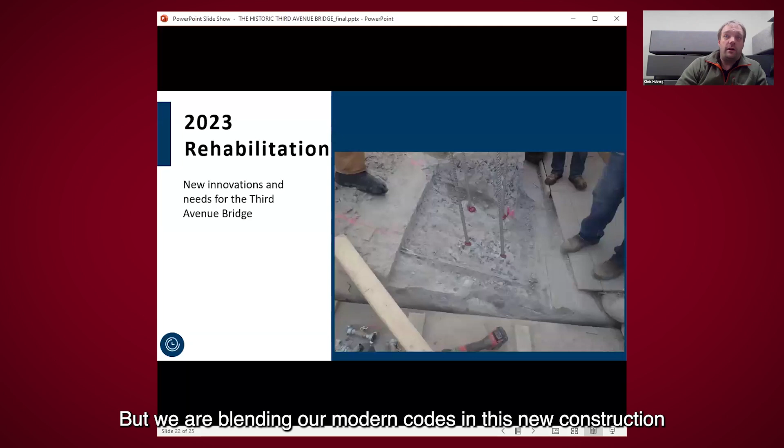One of the things we ran into is we're replacing the columns, and the way those columns attach to the arches is a critical item for the engineering of the structure. It has to be robust enough to withstand all the forces it's up against. But we are blending our modern codes in this new construction with in situ materials and an in situ design. So one of the problems we ran up against was how do we anchor these new columns to the existing arches without damaging that historic legacy?

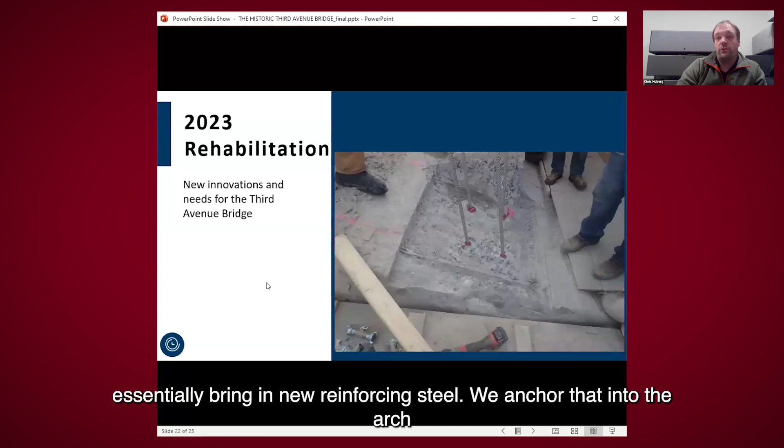So we essentially bring in new reinforcing steel and anchor that into the arch. But from a design perspective, we needed a certain amount of capacity out of that reinforcing steel, and our modern codes—the depth of that reinforcement plays into the strength we see. We've got complicating factors with the existing arches too: there's steel and structurally significant materials there that we have to avoid.

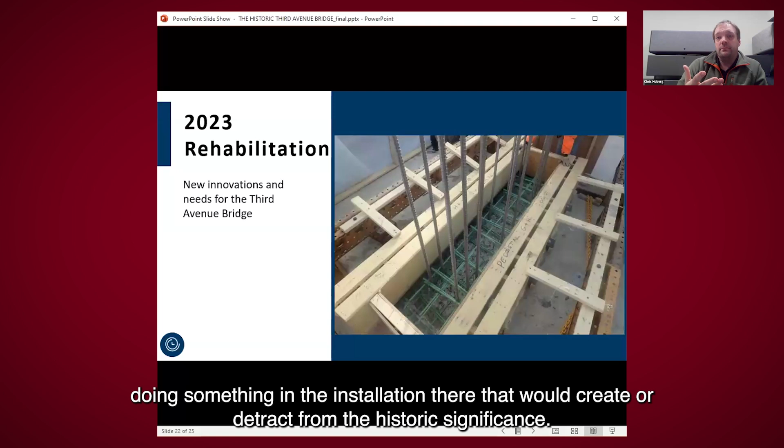So we had to come up with a pattern for these anchors. We had to make sure we weren't doing something in the installation that would detract from the historic significance. So we utilized a novel theory here—a deep anchorage theory, it's called. Essentially, to get away from the limitations of traditional chemical anchorages, we drilled deeper. That allowed us to fully develop the reinforcing steel without having to drill all the way through these arches and pin from the backside, which would have represented an adverse impact to the historical significance.

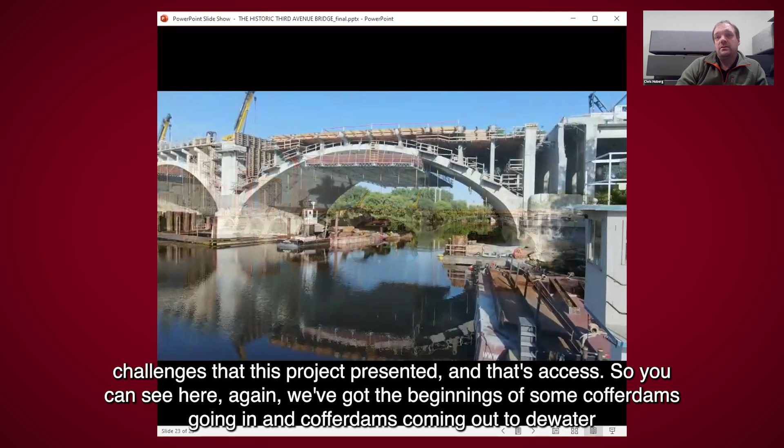So that's one example. I have a little video here I'd like to show. It helps show the scale of the project during construction, but also points out one of the really big challenges this project presented, and that's access. You can see here the beginnings of some cofferdams going in and coming out to dewater. We have these suspended platforms from the arches that provide access to work on the structure and also capture materials we're taking off the bridge.

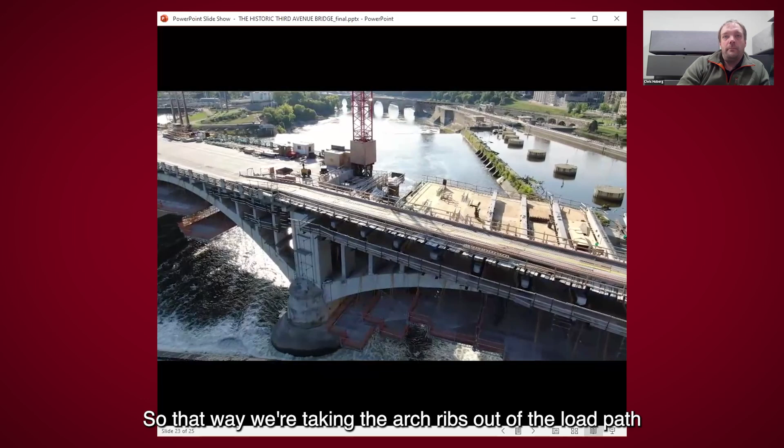You've got these cranes—one of the challenges here is loading and unloading the bridge. We can't do that asymmetrically, or we're going to induce new damage into the structure. So we utilize tower cranes in this case; those red cranes come up out of the piers. That way we're taking the arch ribs out of the load path, allowing us to sequentially remove and place new materials while ensuring the arches aren't loaded asymmetrically during construction, which again would induce damage.

We have temporary bridges out there over newly reconstructed portions of the superstructure that allow access during construction without a deck in place. So a lot of different unique problems that we ran up against, but at the end of the day, we have an objective to meet, which is to extend the service life of this structure and keep it in its current use.

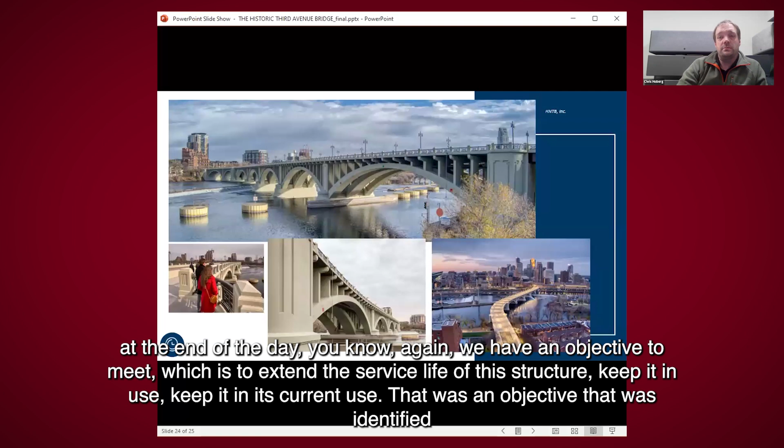That objective was identified well before the project came along, when we were looking at this from a historic resource perspective. But also, the big scope of the project—replacing the deck, replacing the columns—gave us the opportunity to really touch every part of the bridge, take care of any deterioration we found, and address the primary drivers of deterioration.

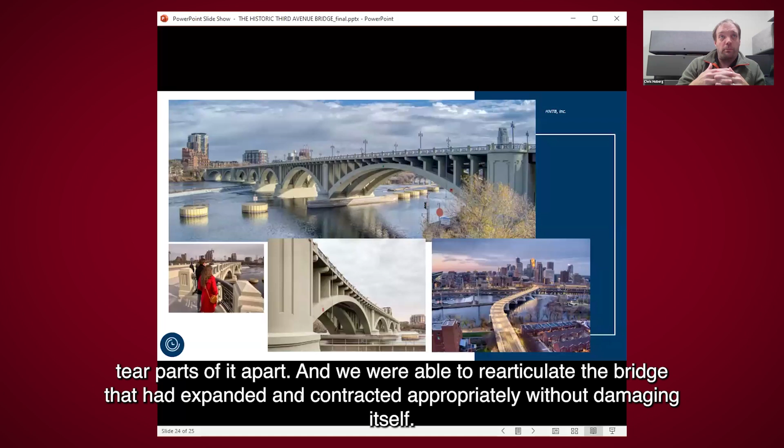Thermal movement of the bridge had started to tear parts of it apart, and we were able to re-articulate the bridge so that it expanded and contracted appropriately without damaging itself.

Management of water from the deck—in northern climes in Minnesota, the number one cause of premature deterioration of concrete is chlorides. They get into the concrete and initiate corrosion of the reinforcing steel. The old bridge had about 36 expansion joints in the deck. We were able to knock that down with our re-articulation to about 14. Those joints are all points at which water can move from the deck, carrying salts and chlorides down to the superstructure and substructure below, inducing damage there.

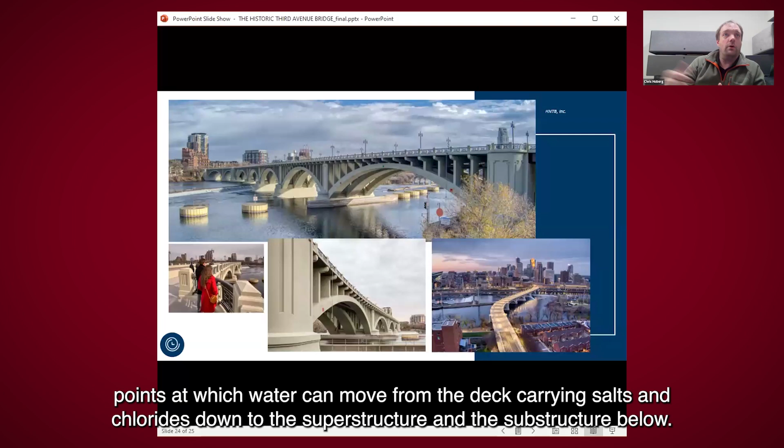So the scope allowed us to really address those things. It also allowed us to take a hard look at the aesthetic details present during its initial construction and its period of significance, and bring back some of those things that were lost over 100 years of use and refurbishment—really trying to pay homage to its history, treat it the right way, and extend its service life well into the future.

Well, thank you Katie, thank you Chris. And I understand, Chris, from our previous conversation, that you really had to make sure Katie was happy, right? Because she was the historical guru on this project.

Katie was a tremendous resource to the project. When you're dealing with a historic structure, there are federal protections involved in the United States—laws that protect historic properties—and I'm an engineer, not a historian. So that's a big hole in my knowledge base when it comes to a project like this, and Katie was central to making sure we did this in the right way.

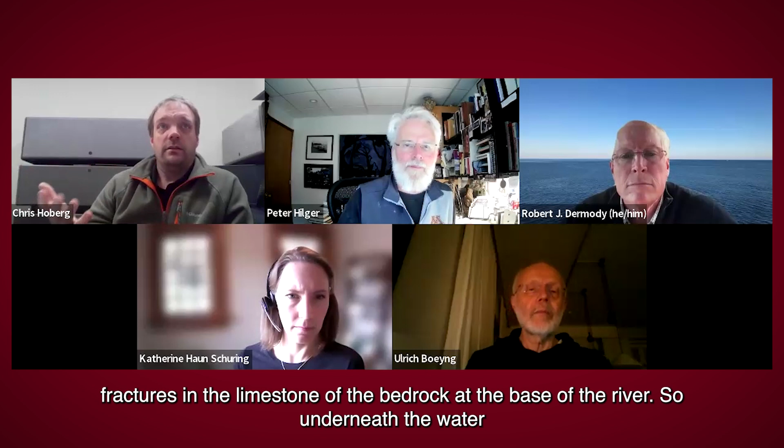One of the things that's really interesting in Minnesota, in Minneapolis in particular, with the history of bridge building over the falls of St. Anthony and that area, and the amount of industry that had taken place in the early years of the city of Minneapolis, people started to identify fractures in the limestone of the bedrock at the base of the river. Underneath the water, the geology of the falls is such that you have a limestone cap highly resistant to scour from water, but it sits on top of about 16 to 20 feet of sandstone, which is highly erodible.

So from the time that the glaciers in this area started to recede 10,000 years ago to today, the falls had actually moved upstream an average of about 4 feet a year in the latter years because of the action of that water coming over the falls and eroding the sandstone below, leaving a cantilevered limestone shelf that eventually broke under its own weight. Can you see this?

And all these piers are built on what's called spread footings or shallow footings, so they bear directly on the bedrock. Whereas, you know, a lot of times in modern construction, I think in Ulrich's presentation, or maybe it was Robert's, there were piling driven underneath the piers down. Those are deep foundations. This bridge is built on shallow foundations, so it sits directly on the bedrock. So the condition of that bedrock and its surrounding area becomes really important structurally.